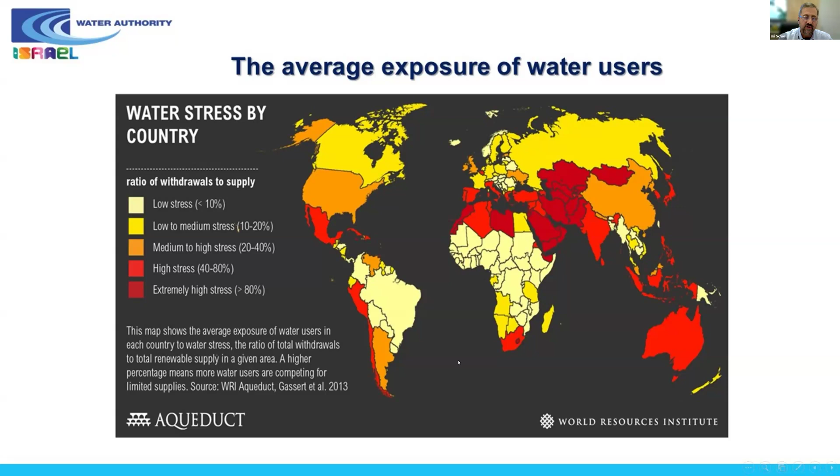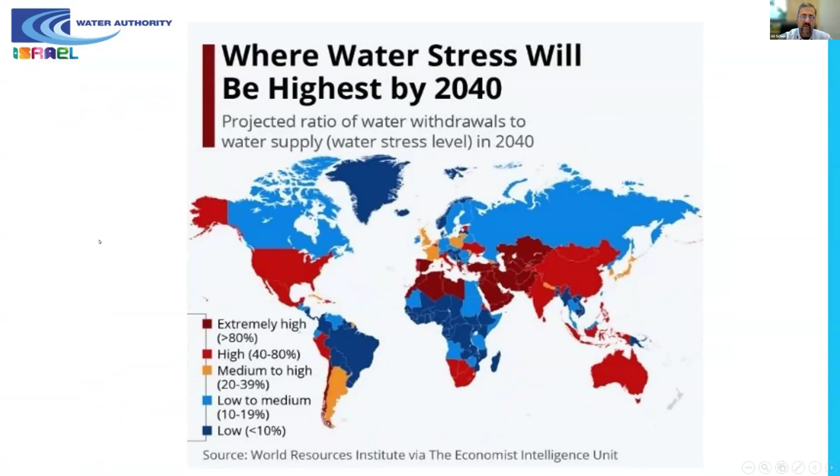If you look at another map from the same institution, one can see how it's predicted to be 15 years from now. You can see that our region is even getting worse. By this map, you can see that South Africa is staying more or less the same. But again, the same is not good. One should try to tackle climate change as quickly as possible because you can't wait for that.

Due to climate change, a real global problem - not only South Africa or Israel - there's less water per capita due to deterioration of infrastructure, lack of awareness, caring, etc. The UN estimates that within a year or two from now, almost 2 billion people could face real water scarcity. And 25 years from now, almost half of the world's population will be living in countries chronically suffering from water shortage. The solution should really be a holistic, centralized water management approach and a rise in awareness, understanding, and motivation for action.

I took from the internet different averages of annual rainfall in a few towns in South Africa. One can see that the quantities of rainfall received annually are very low compared to other countries that are rich with water. It's more or less like in Israel - if you look at Israel's southern city, Eilat, you get only 2.3 centimeters annual average rainfall, which is hardly any water. It's in the desert, southern part of Israel - this is Eilat.

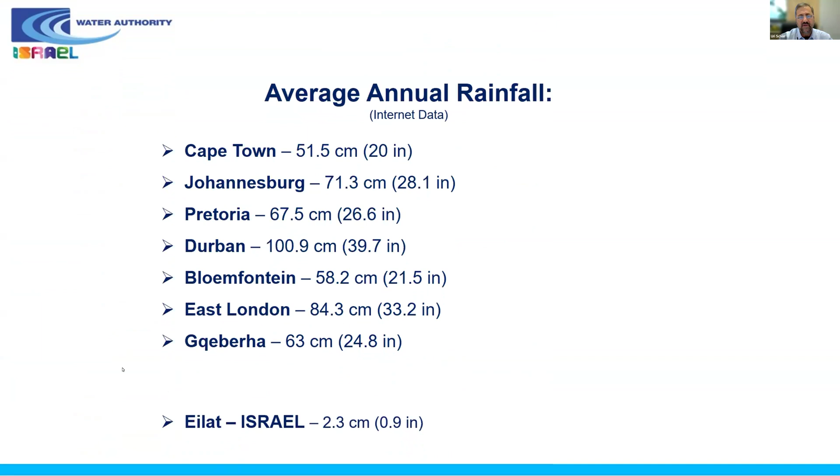In Israel, a few facts: 60% of Israel is desert, and the rest is arid. Since 1948, Israel's population has grown by 15 times. That's tremendously a lot, and the more the population grows, the demand for water grows.

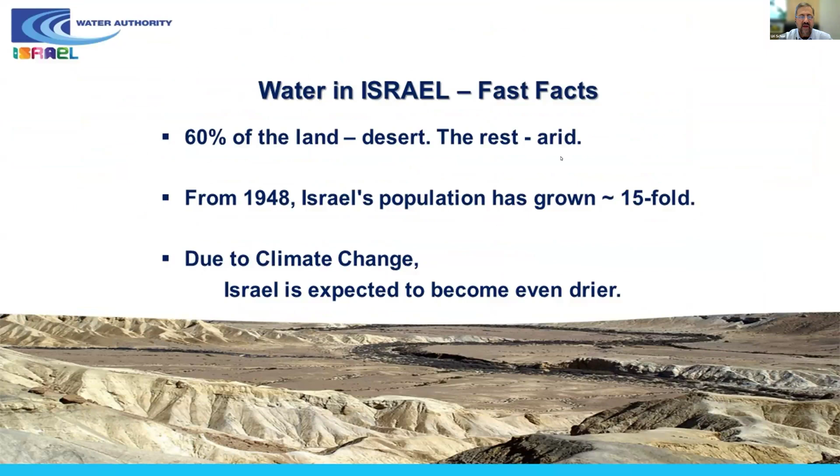Due to climate change, Israel is expected to become even drier. If we look at the trends of rain in Israel due to climate change, one can see that over the last 30 years we've gotten less and less rainfall in the area. All the models say that in the coming future, even the next 30 years, it'll become even less rainy. As we get less rain and population keeps growing, the bigger the problem is.

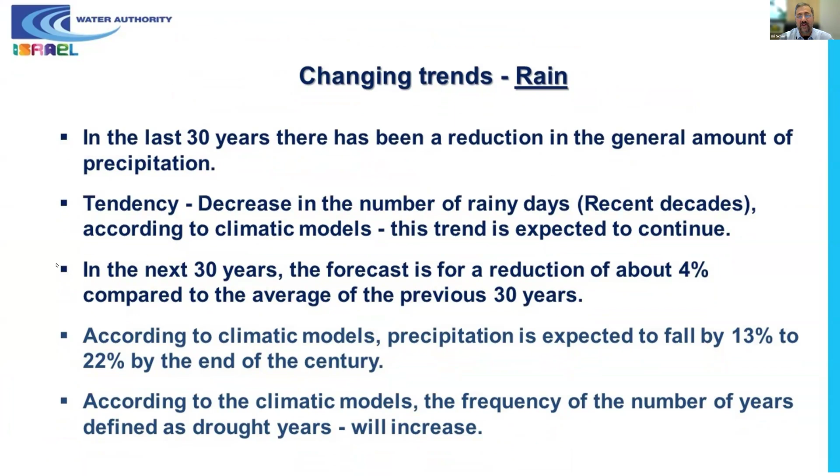And it's not only rain, it's also temperature. One can see that the average temperature in Israel rose by about 1.4 degrees Celsius, and that's really a lot. All the models we have show that it'll even grow higher. The higher the temperature is, the more evaporation you get, and the less water you receive in the water reservoirs.

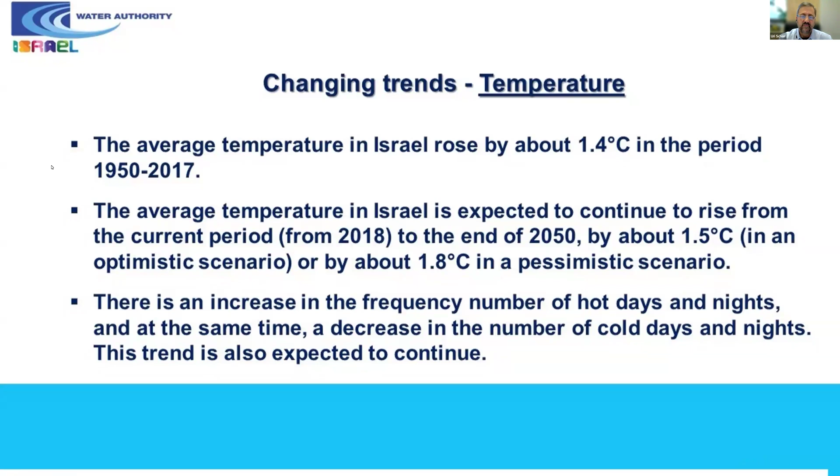So in order to prevent the next crisis, we all the time need to manage the water shortage. It's not that you need to manage the water, you need to manage the water shortage. First of all, you have to identify the problem, and then, of course, exploit the potential of the water.

Once you get rain, even if it's just a few days of water, you must catch it. You must build flood perception systems and reservoirs in order to collect the water and keep it for the days when you haven't got any rainfall, in order to have water.

You have to reduce the demand. We reduce demand by fixing leakages and water losses, a lot of conservation, education, and campaigns. That's my main work, and I'll talk a bit more on this. Also a lot of technologies, and even pricing.

And if that's not enough, you must create new water. New water we create here by recycling water. Israel's water recycling is number one in the world. I'll speak about it a bit later. And we desalinate seawater and brackish water.

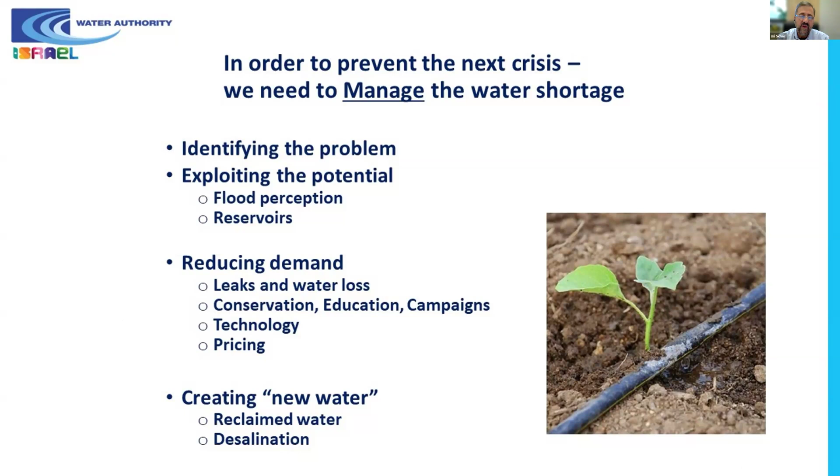But I want to start with the base for change: the acceptance of the public. The public must understand, the public must know. Therefore, you must raise awareness to the problem that we have, and it's a joint problem that we have. But it's not enough really to raise the awareness.

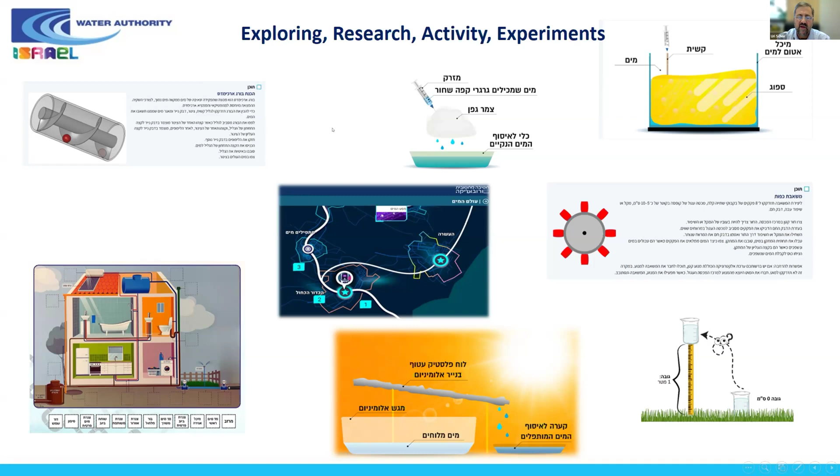Everything involves a lot of exploring, research, activities, and experiments for different ages on almost everything. I'm always developing more, to get the kids to understand, because I realized that if you teach the kids, you reach the parents too. We start education at a very early age, even before kindergarten, and continue with explanation and campaigns in all different languages.

We gain twice: first, it's easier to reach them and help them understand problems, and sometimes we even get very good ideas from them. And when they grow up, some of them continue and come back to work in the water sector.

Everything is accompanied by different methods of observation, research studies, and surveys. We constantly check and double-check ourselves and learn from our mistakes. I fell into so many holes, stumbled over so many hills, but until we reached a certain way of doing things, I learned every day, and still do.

I'm open to that, and I encourage all kinds of knowledge, even from outside Israel, to combine with us. We learn from you, you learn from us. It's a win-win situation for everybody.

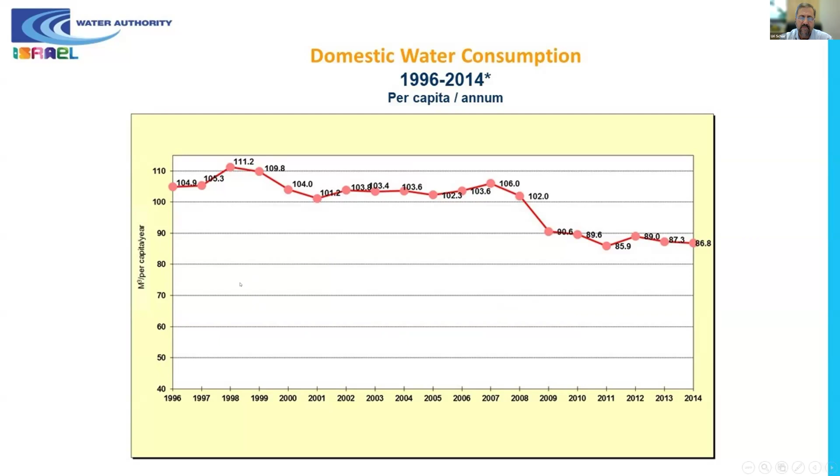In agriculture, it goes, first of all, by each farmer hearing and understanding the campaigns and the education, etc., because his kids go to school, and he opens the TV or the radio or sees the signs on the streets or his mobile. So he gets everything. That starts from there. Then we have also different technologies that can manage and require the growth with less water. So once there is the knowledge, the experience, and the technology, it really can be done, and it should be done. So that's more or less the presentation.

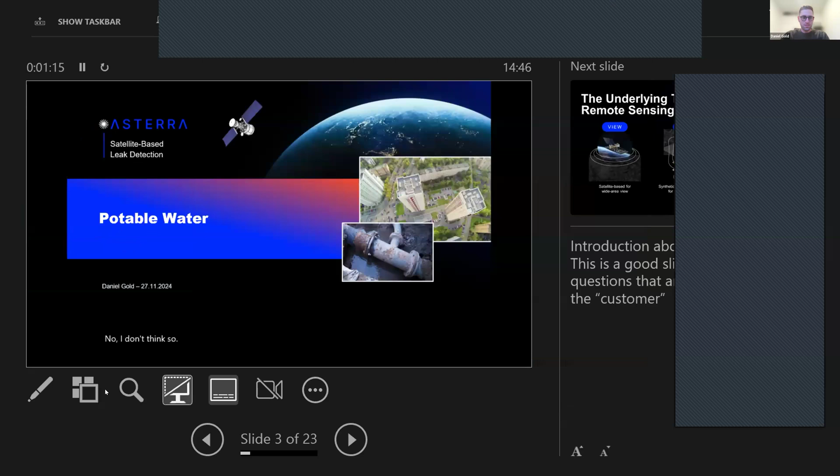One second, Daniel, sorry for interrupting. Your presentation is in speaker mode and not in presentation mode, so basically we see your comments. Apologies for that. Do you know? Sorry for this. I think it's, if you go down, there is an icon, yeah, I think it's this. The next one? No, I don't think so. One second, apologies. Maybe now. Okay, one moment. Okay, is it better now?

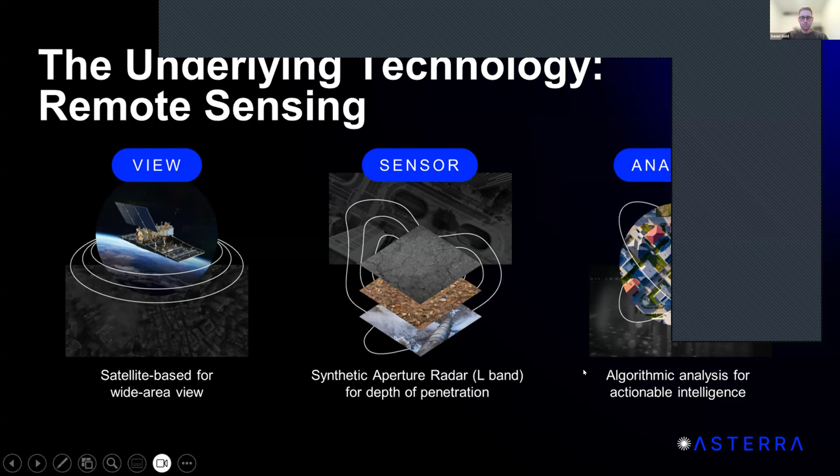Yes, okay. So as I said, what we're using is synthetic aperture radar technology in order to detect leakage subsurface. We're doing that basically using SAR, the synthetic aperture radar technology, which takes an image of a certain area of interest. And the image, although in the raw phase of it, doesn't provide much information, but the data that it contains, with our algorithm, we can provide our end product, which is a map that guides leak detection people on site to where it's possible to find with high probability where the subsurface leakage is situated. So a little bit about the synthetic aperture radar.

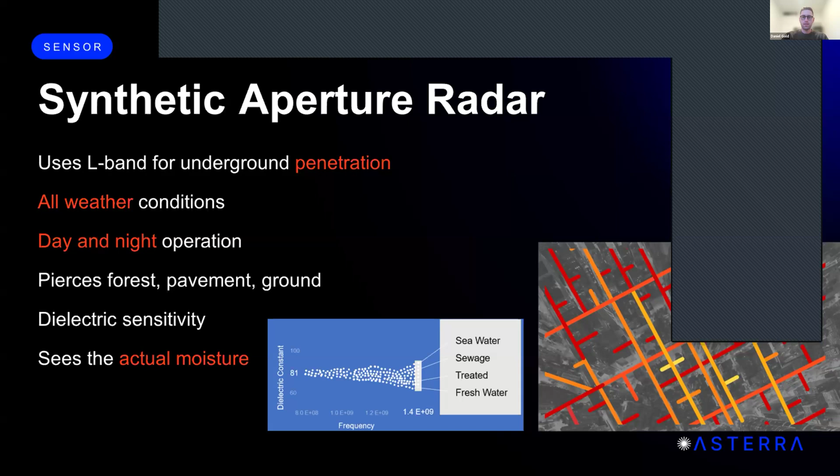We used L-band for underground penetration. We can work in all weather conditions, 24/7, day and night, and we can go through forest, pavements, ground, and we're able to differentiate different types of water to understand that the water we're looking for is fresh water. Because what we help water utilities with, in the end, is to improve their infrastructure and lower their NRW. And what we see is not broken pipes, as many may think, but actual moisture, the mixture between water and earth. That mixture is the footprint of what we catch with the satellite, and then we analyze it and provide you with the data.

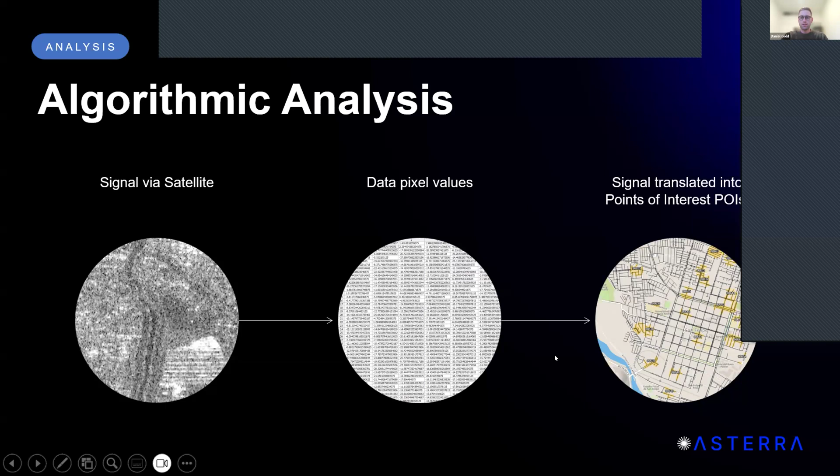So it's mainly a reactive approach for when there's already a burst of water or something of that sort, unless you use some data to provide you with the information of where you need to go.

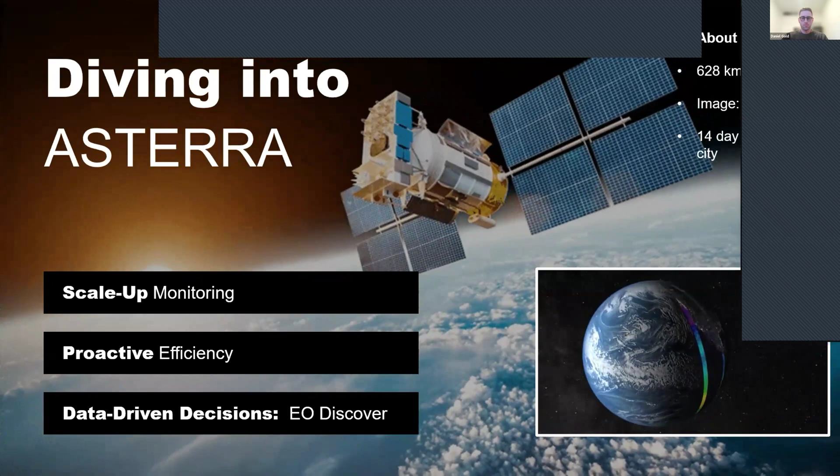The whole point of using Asterra is to downsize the area that you would like to investigate. For example, there could be a water utility that owns a network of 5,000 kilometers of pipeline. It's very hard to find all the leakage during the year with a 5,000 kilometer pipeline, because from the moment you start until you finish, there are always more leakages starting before you're able to fix them. So what we're trying to do is find more leaks before they reappear.

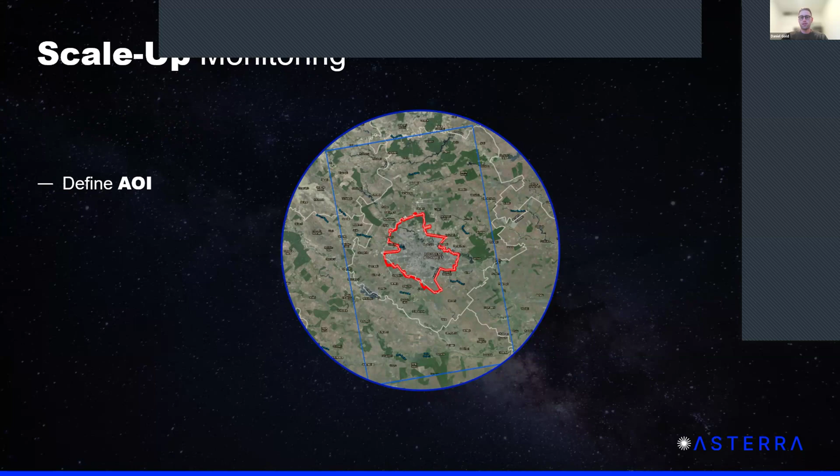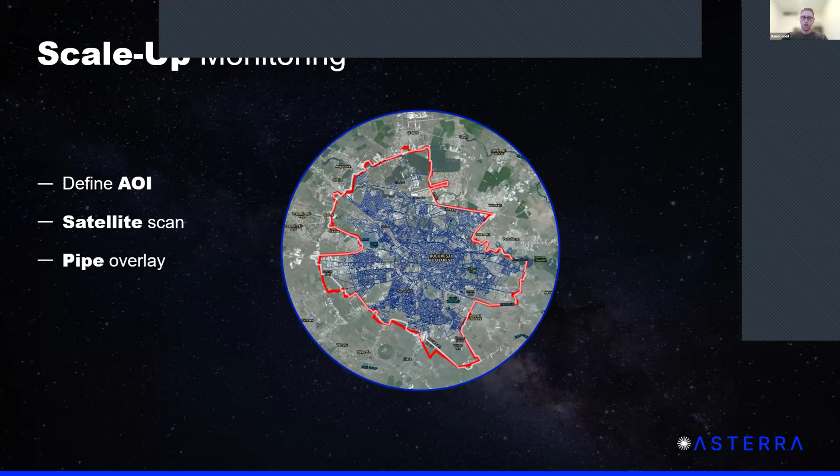Now, to dive down into the process of using Asterra: you define an AOI, an area of interest. For example, in front of you there is Bucharest in the red markings, and the blue markings, the square, is the size of the SAR image. After we take the image, the black and white image, we're able to analyze it and add the pipeline GIS onto our system, and provide you with a map that has the probability in each of those yellow sections of where you can find those leaks.

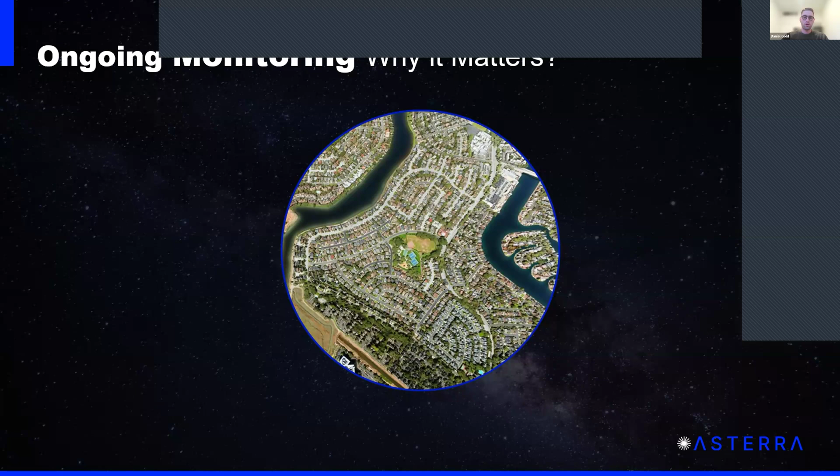Now, why is ongoing monitoring important? It takes time for leaks to reoccur, but it happens all the time. Every vibration, every flood, every rain, every change in the climate or environment can cause more leakages. So it's always important to take care of our system in order to prevent NRW from increasing, and it's very important while doing ongoing monitoring to be able to lower it.

The more images we take of a certain area, the more potential points of leakage we can find. We're talking about small to medium-sized leaks, not the big ones that anyone walking on the street can see. Asterra is specifically used to detect those small to medium-sized leaks that happen beneath our feet, that we cannot hear or see, and those silent ones cost us a lot of money and a lot of water.

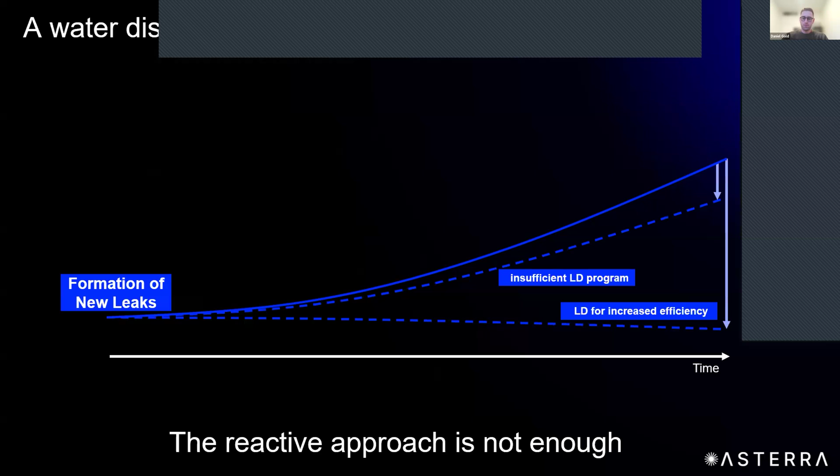As I said before, the whole idea of using Asterra is to find more leaks that are already in the system before they reappear. The reactive approach, as it says here, is just not enough.

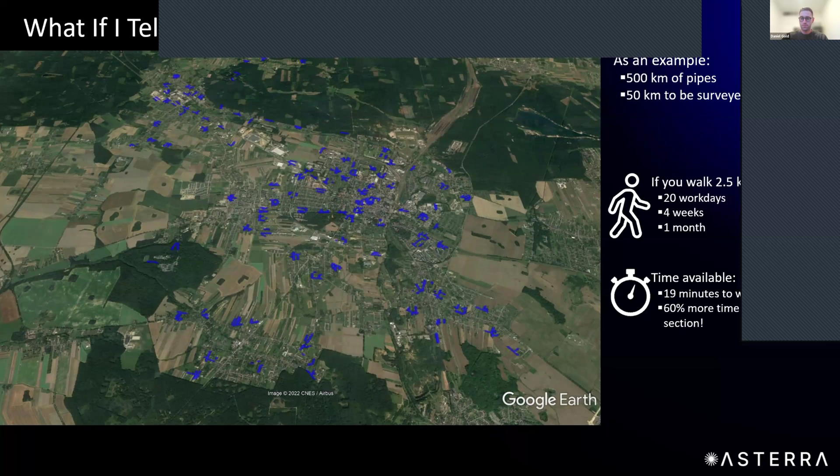Another layer of data that we have is the master plan, which is an added layer to the utility's set of data for decision making when it comes to pipe replacement. The master plan provides the utility with an idea of where it's better to replace the pipeline, because sometimes we have higher NRW in certain areas.

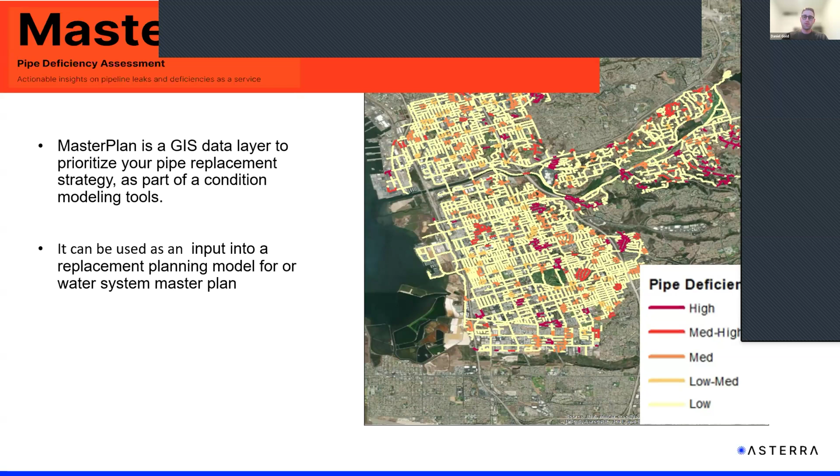Some utilities may only have the budget to replace 1% or 5% of their pipeline. It's very expensive, and it also depends on the country, but it's expensive everywhere. Having another set of information to help you replace those pipelines will result in a healthier system down the line.

All of the metrics that you see and all of the data that the leakage teams are on site looking for eventually goes to our platform, the dashboard that the management can use to analyze and see how much leaks were found, how much money they saved, and how much water was saved during the process of leak detection. That is called EO Discover, which contains all of that data.

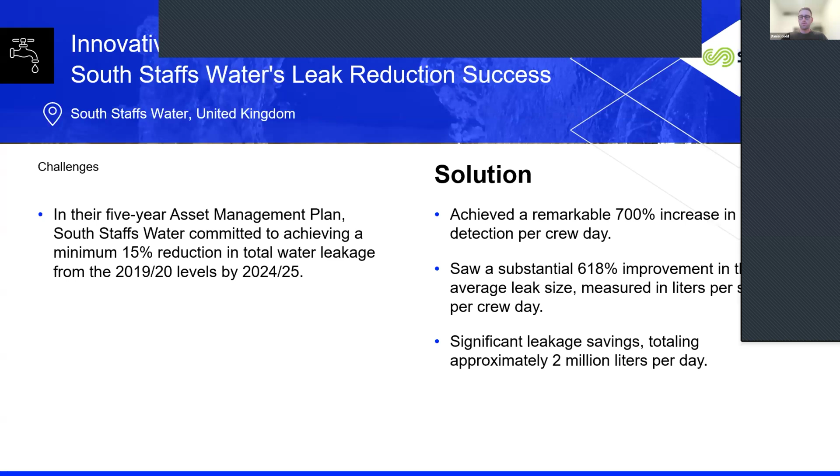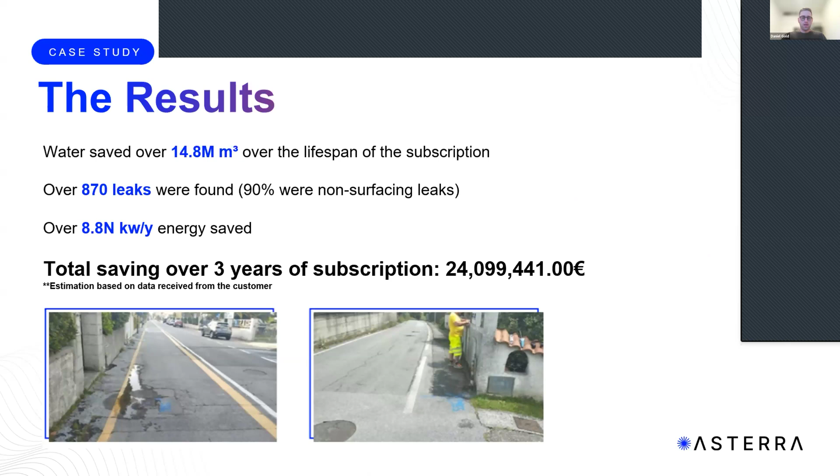Another example is a project we have in Gaia for a 3-year subscription. After starting using Asterra, by the end of the subscription we were able to help save about 24 million euros over 3 years. Not only the money, but also the amount of water and energy saved by improving the network for now and in the future.

In a nutshell, Asterra is working in 64 countries with over 600 customers and 118,000 leaks verified so far. We will continue to help and improve, because every drop matters.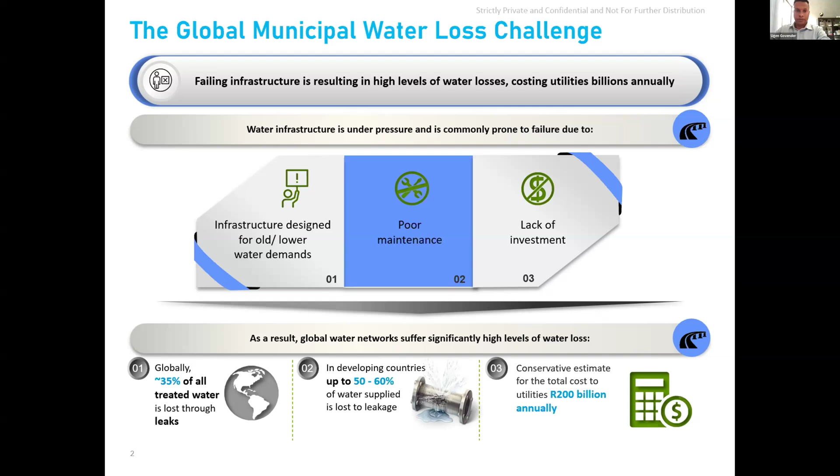The background leakage challenge is where we want to come in, and we want to propose a bulk leakage repair solution that will provide an opportunity to cost-effectively repair background leakage, which contributes to about 70% of total leakage. As Daniel alluded to, 10% is allocated to the typical high flows, short run times notified to the water utilities by customers - those are your reported bursts.

20% is the typical moderate flow rates, long run time located by active leakage control, and those are normally the unreported leaks and breaks. But the majority of the leaks is background leakage. This is where you have leakage of joints, fittings, and service connections, and these run continuously and often undetected.

The bulk leak repair solution will target background leakage. This type of leakage has been expensive to treat using traditional repair mechanisms, and the bulk leakage repair systems provide an opportunity to repair background leaks cost effectively with a bigger impact.

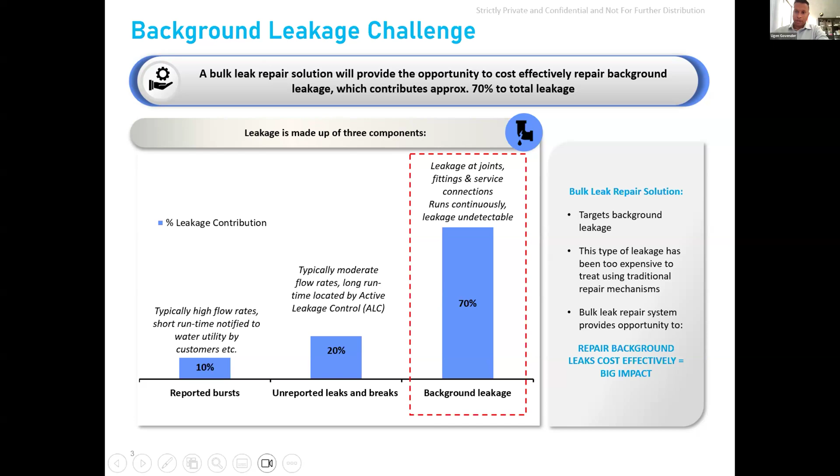Aquicure is a water business providing a new and innovative differentiated bulk repair service for South African municipalities. We are a licensee of the Curapipe technology. We make use of a technology called TALR, meaning trenchless automated leak repair, which is designed to provide an internal pipe leakage repair solution for multiple leaks in a water distribution network.

TALR is best applicable for pipelines with heavy leakage from multiple leak sources within treatable pipe sections that are not required to be replaced due to end-of-life situation. TALR is applicable to a wide range of pipe materials. It is a standalone system that self-detects water leaks in a pipe and automatically repairs them. An isolated pipe section of mains and service pipes is required, and actual levels of leakage are measured before and after treatment.

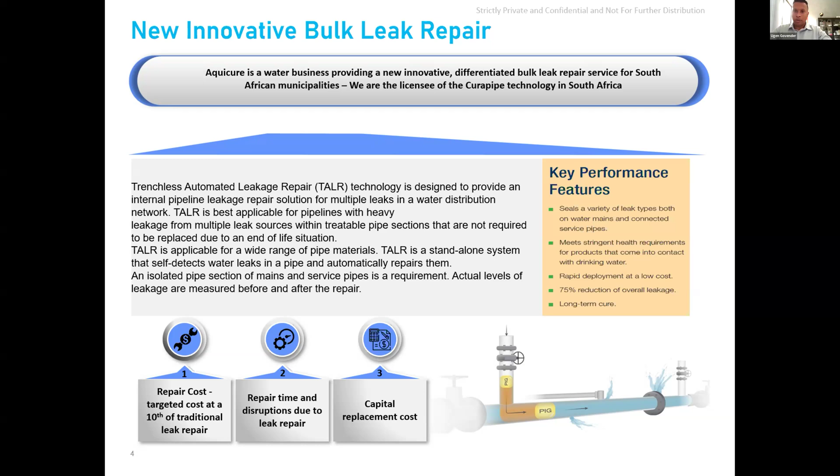The key performance features of the technology: it seals a variety of leak types, both on water mains and connected service pipelines. It meets stringent health requirements for products that come into contact with drinkable water, and we do have in South Africa the SABS approval to use the product. There is rapid deployment at a lower cost and a guarantee of 75% reduction of overall leakage. The system also provides a long-term cure for any leaks detected within the pipeline.

This is a picture describing how the system works. The picture on the right illustrates the pig train. If the treatable section is fitted with fire hydrants, we introduce the pig material through one hydrant and run it through the pipeline, then eject it out of the next available fire hydrant. So there's no need for any physical excavations for the treatment section.

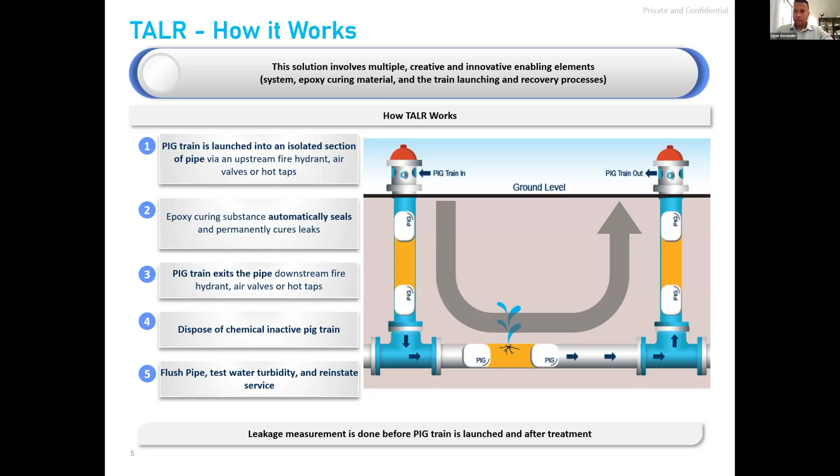A quick rundown: the pig train is launched into an isolated section of pipe via an upstream fire hydrant, air valve, or hot tap. The epoxy curing substance automatically seals and permanently cures any leaks within the pipeline. The pig train then exits the downstream fire hydrant, air valve, or hot tap. We then dispose of the chemically inactive pig train, flush the line that was treated, test water turbidity, and reinstate the service back to the municipality.

We have global accreditations across multiple countries, South Africa being one of them. A few of our case studies internationally: there have been pilots done in Italy, Mexico, and again in Italy, 2 sections, basically a 4-inch pipe, with various material types treated. The important result is the leakage reduction. In Italy, both treatment sections obtained 100% leakage reduction, and in Mexico, a 95% leakage reduction.

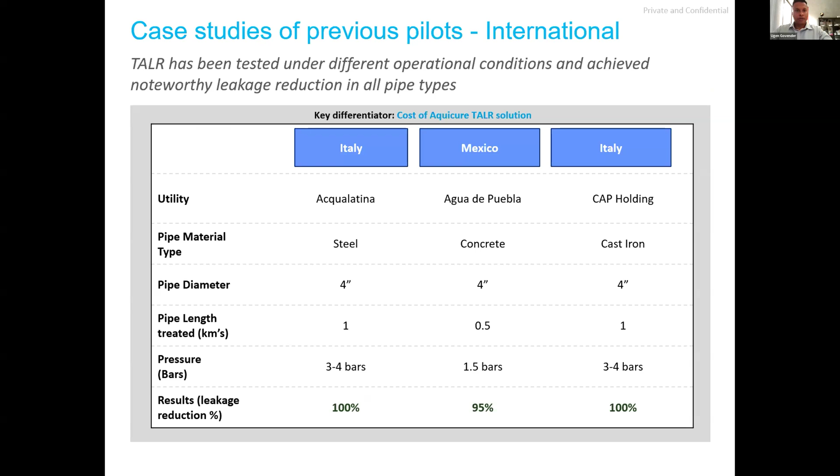Coming back home, within South Africa we've run a number of pilots, and this is not all of them, just a few highlighted. In eMalahleni, we did a total treatment of 1,582 meters. Annual kiloliter saving of water was 75,713 kiloliters, and the total leakage reduction was 100% within the treated lines.

At Alfred Duma municipality, we treated a small section of 334 meters that resulted in an annual kiloliter saving of 48,180, again 100% leakage reduction. Within Mangaung municipality, we treated 810 meters of piping with a saving of 9,290 kiloliters per annum, again 100% leakage reduction. Within Buffalo City municipality, a total treatment of 876 meters with a total water saving of 25,404 kiloliters, again 100% leakage reduction.

This is the main technical data for the current technology. I'll work on a metric system. The treatable mains are between 50 to 200 millimeter. The treatable service pipes are between 10 and 50 millimeter. The maximum treated length, we try to target anything between 100 to 400 meters.

As you can see, the pipe material, we can work with ductile iron, HDPE, PVC, so you can use it over a multiple range of pipe material.

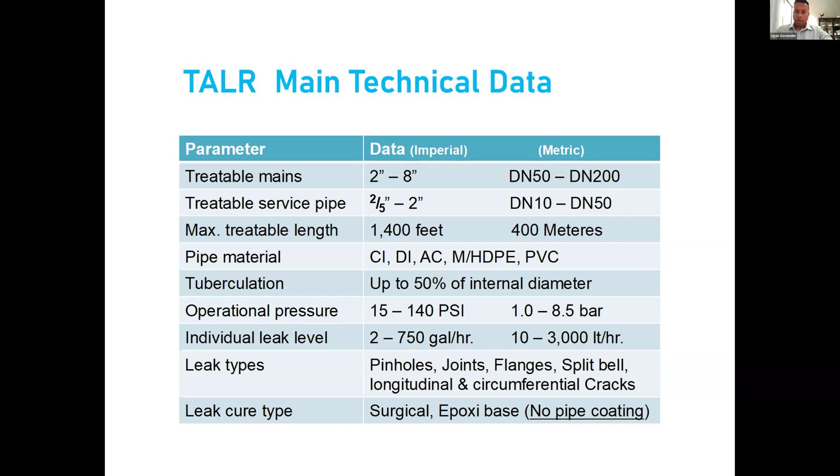The types of leaks that the technology will work on are pinholes, joints, leaks on flanges, split bells, longitudinal and circumferential cracks. The leak cure type is surgical epoxy-based, non-coating, meaning your pipe diameter is not affected.

I just got a short video to play. There is no volume, so you guys can just have a look.

No, it's not playing on our side. You get it now? Not yet. You see it now, Steph? No, not yet, we still see the TALR video clip screen, but nothing is playing. Okay, just want to share it again. I've reloaded, can you see it now, Steph? Nothing yet. Otherwise, we can share it with our attendees after the webinar.

Okay, no, great stuff, thank you very much. It's always amazing to see such innovative technologies implemented across the vast fields of South Africa. So thank you for sharing that. I think that last slide of yours really defined your product and capability. So thank you for sharing that.

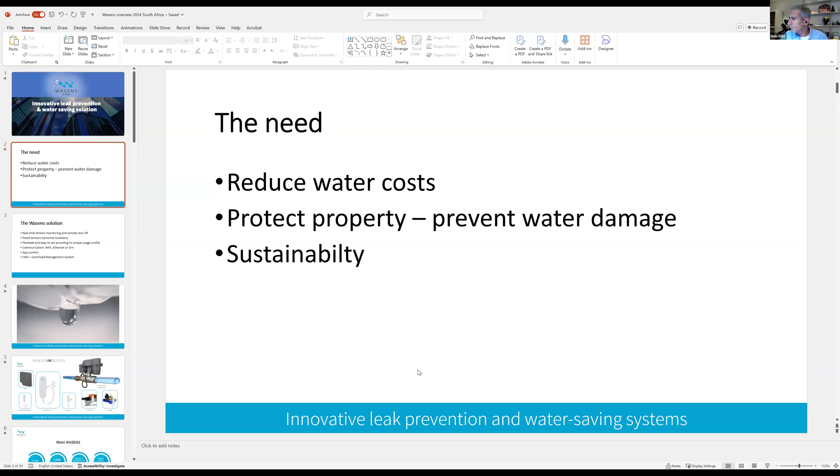So do you see it in presentation mode? Not yet. You see my screen or something? What do you see? We can see the screen with your presentation, just not in presentation mode. Okay, so I need to change something here. Yes, sorry, I think at the top we have autosave, on save, undo, reload, and next to that is the presentation mode. Just press F5 on your keyboard. F5, let's see. Yeah, work? No, not- Yes. Oh, there we go, yes. Okay, great, thank you for letting me know.

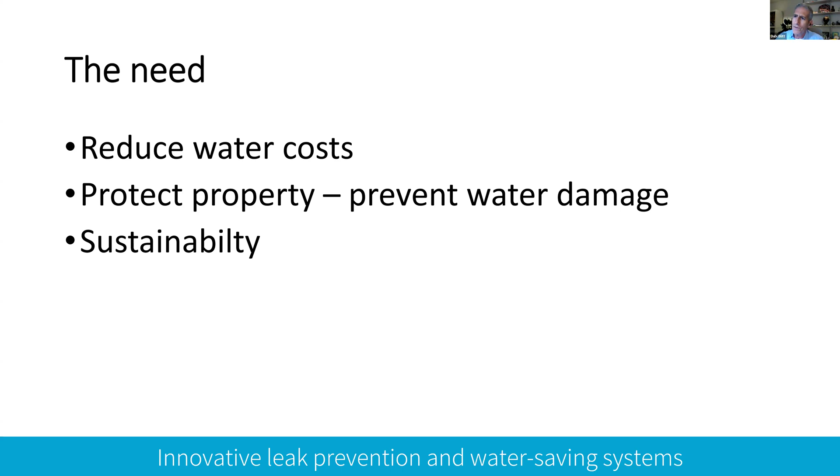What we've seen until now in the presentation is the infrastructure, and we are dealing with the end consumer, which we'll soon see in the solution. But the need is to reduce water costs, to protect property - it's the end user's property - and sustainability. These are the motivations that people have to use the solution that we have.

What we do is real-time stream monitoring and remote shut-off. So if there's irregularities, we can close the water automatically. We also have flood sensors to cover different scenarios.

It's very flexible and easy to use because each person uses his water differently, and you must be able to ensure that it doesn't have false positives, or on the other hand, that you will have a leak that it won't detect. So it really needs to fit your profile, especially if you want it to be in automatic mode.

It's connected to the cloud, so you need to have different communication abilities like Wi-Fi, Ethernet, or SIM. And you also need to have application control and also a centralized management system that you can do from your computer. So there's a short video here, hopefully it will work.

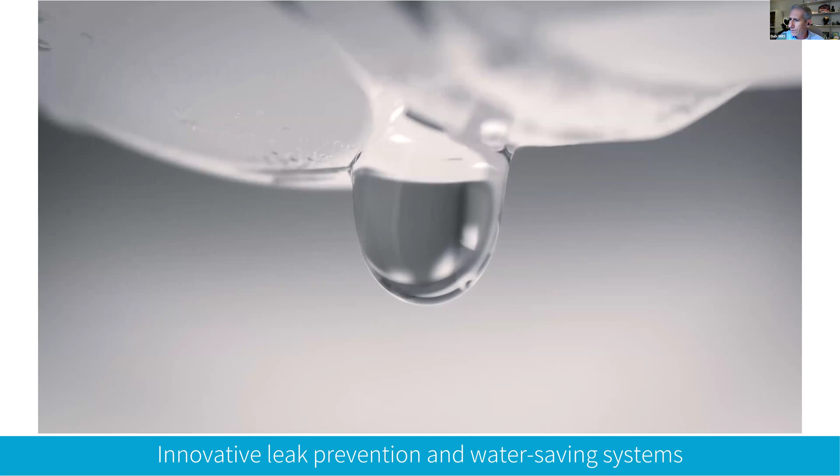Can you hear? We can't hear, but we can see the visual. Sorry, you said you cannot hear it? No, we cannot. So maybe I will talk while it's going on. Perfect, okay, because there's a bit of marketing here, so there's nothing to translate.

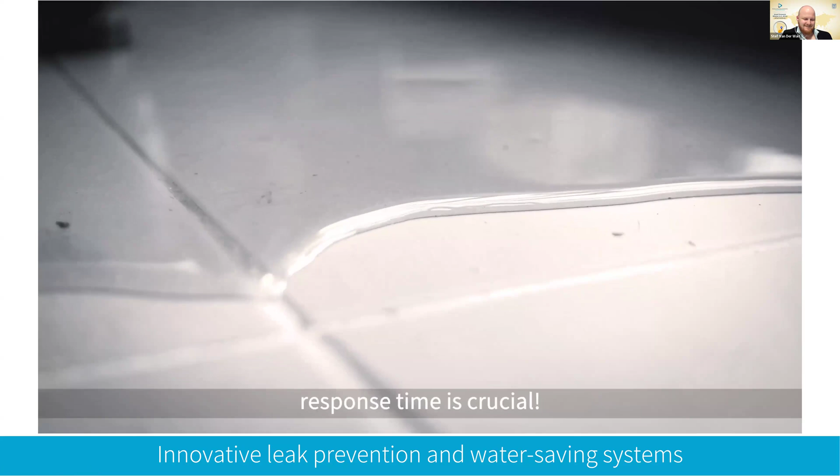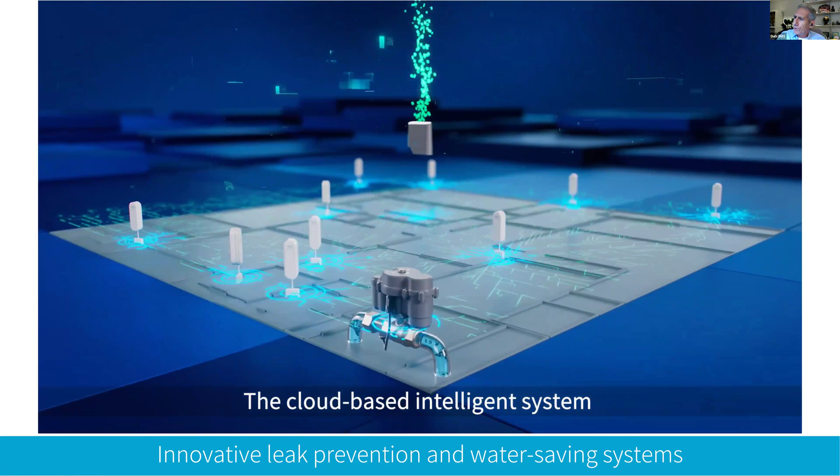That's the app control. This is the actuator that can close and open. This is the communication.

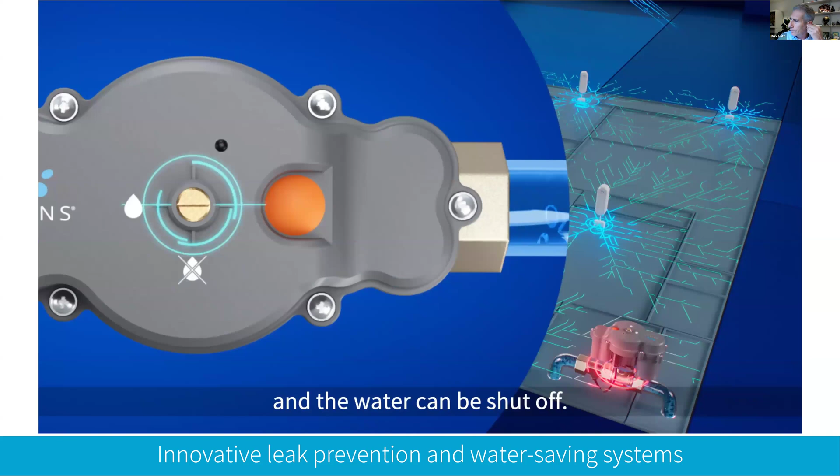Okay, so sorry for the video, but there were subtitles, so I hope you got some understanding. Any questions until now? I don't want to lose you guys.

So please feel free, if you have any questions, please feel free to ask. That's very interesting. Just a quick question from my end.

With the actuator, does it autonomously shut down when there's a leak detected? It's according to the settings you give it. You can tell it to alert or to shut down, and there are different scenarios of low stream, high stream, and different irregularities. You can say on the weekend shut it off, or if it's business hours, just alert. Because otherwise it's difficult to be in an office building without water, right? Or in the middle of the shampoo, the water shuts off.

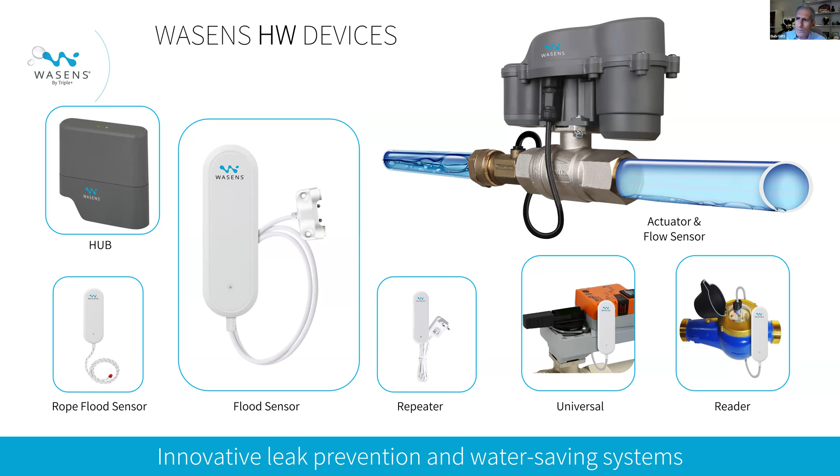Let's talk a little bit about the company. We're 10 years in the market, and our major customers are insurance, construction, and facility management companies. We're based out of Israel, but we also have distributors in Canada and the US. We also have some activity starting in South Africa with a company called MEB. And we have some large global customers.

And of course, a lot of other customers in Israel. We work with all the insurance companies — whenever you have damage, they sometimes force you to install it, or if it's a high value estate or something like that, they require this kind of solution. And it fits from a private residence to residential complexes, office buildings, public buildings, and also industrial usage, because we can give a solution to any diameter.

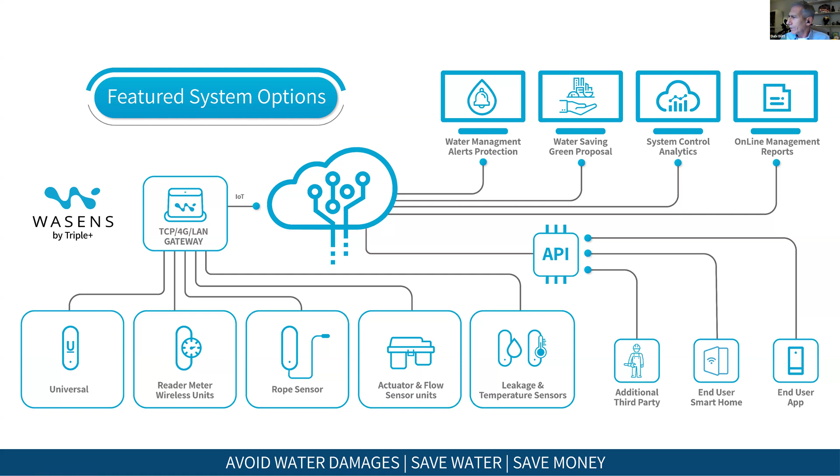But also, even if there is electricity shut off or communication shut off, the system will still work because it's backed up by battery. And the logic is also local — it's not only in the cloud, meaning that even if you do not see the system, it will still protect you, which is very important.

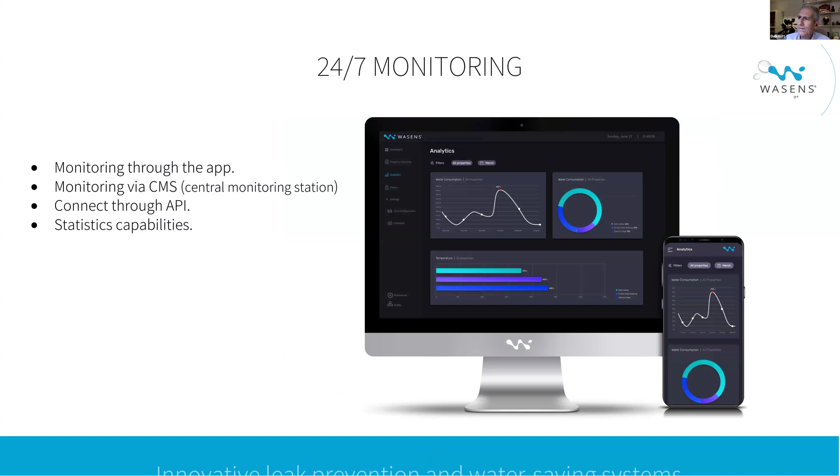This is how you can control things if you have many assets or buildings. So you can see here, this is AON Center, this is the Empire State, and this is the Plaza. You can see the situation in each property, and do a drill down into each property down to the floors. If you find a problem in floor number 4 or something like that, you can see it in the centralized system and dispatch somebody to fix it.

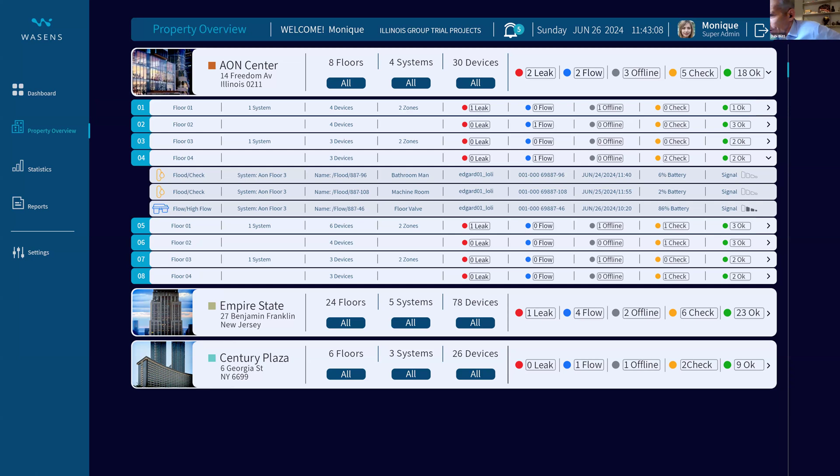So this is highly valuable for companies that have a lot of real estate — very powerful for them. You can also get reports on usage, how much you used this month compared to last month, or this year compared to last year. You can see irregularities, and also do sub-metering if you're renting out places, which is also highly valuable for these companies.